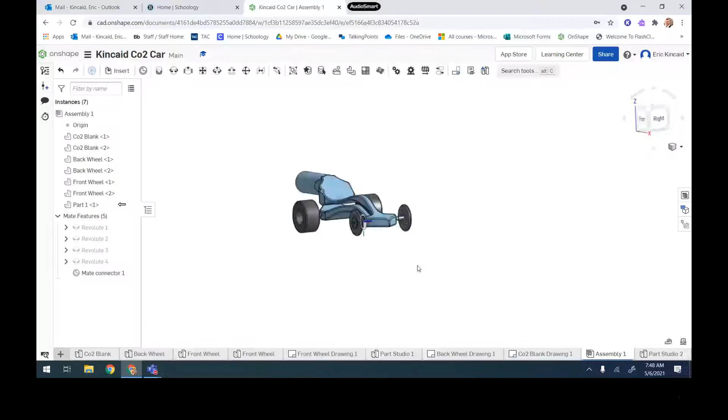All right, today we're going to learn how to assemble our car. So to do that, I'm just going to delete this assembly, and then we'll work through.

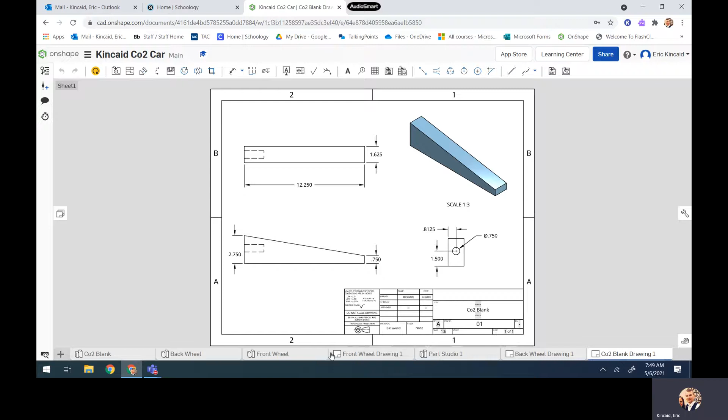I also have two front wheels here, so let me get rid of one. Make sure I got rid of the right one. All right, whoops, there's a leftover axle. Once you have all of your parts, you have your car itself, you have the back wheel, and you have the front wheel, you are ready to assemble.

You can create your axle within the actual assembly, and then we'll pop back to a part studio, right? So you don't have to guess how far your axles will be.

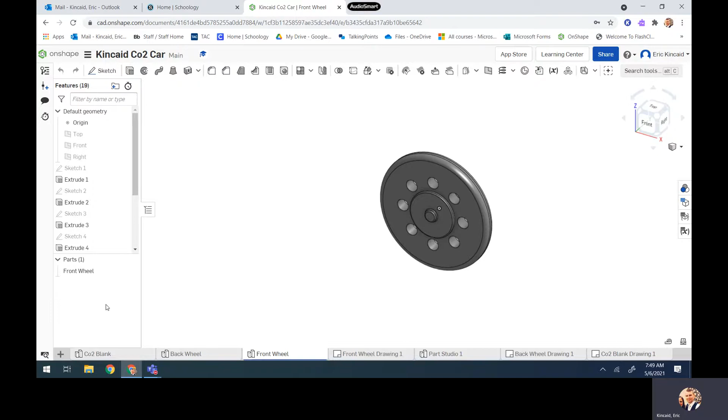So what I'm going to do is hit the plus there and go to create assembly. From there, I'm going to insert all of my parts. So I'll place my blank in there - well, I guess it's not a blank anymore. I'm going to place my two back wheels, and I'll place my two front wheels and hit the check.

Once the placement of your assemblies is in there, you'll see that they are all facing the front. So I'm going to rotate these wheels over here 180 degrees. They don't have to be perfect. I like it so that they are at least 180, and you'll be able to quickly get to them.

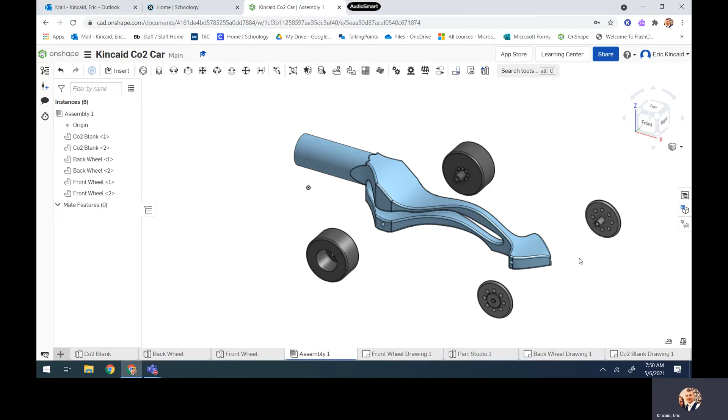But essentially what we're going to do is use revolute mates, connect all of our wheels, and then we're going to offset them 1/8 of an inch from the car, because you do need a little bit of wiggle room between the wheels themselves and the body, or else you're going to have a lot of friction where those two pieces are meeting and rubbing against.

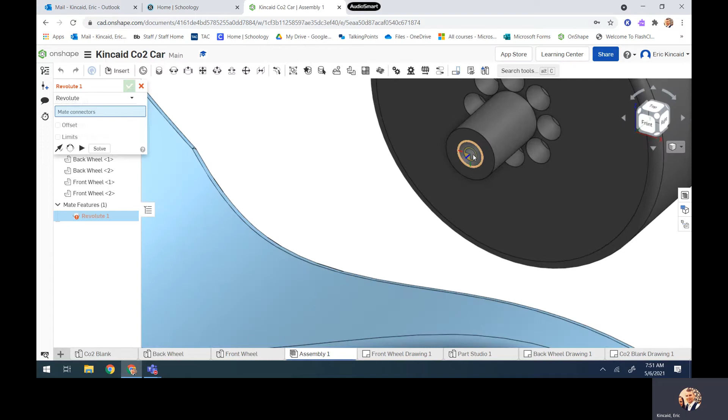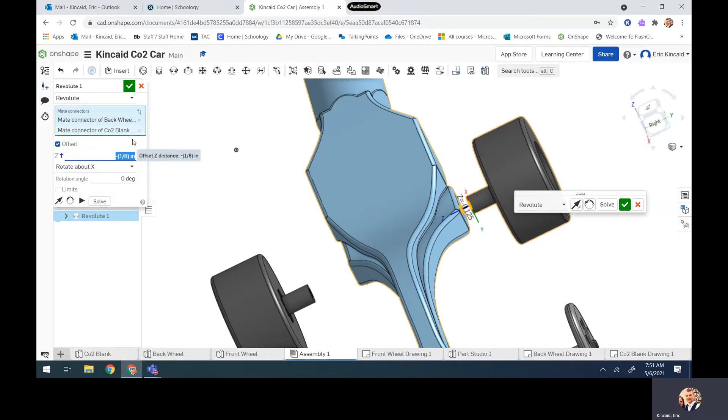So we're going to go ahead and grab the revolute mate, and I'll do the back wheel first. I'm going to grab where the axle will go into the wheel, rotate my car around, and select my axle hole. Make sure that that blue Z line is facing out. And then I'm going to click this offset, and I'm going to offset it 1/8 of an inch. If it goes into your car like that, all you're going to do is hit -1/8, and it'll pop it out 0.125. All right, so I'm just going to go ahead and do that for all of my wheels.

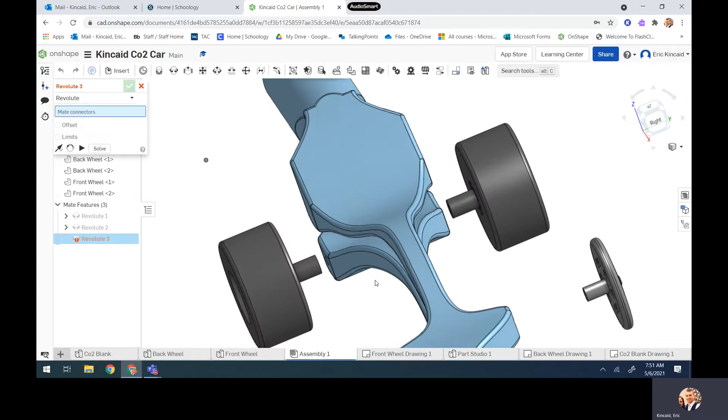So grab where the axle goes, make sure that blue line's facing out. Same thing. And I want to say for mine, it's always going to be -1/8. So it's going to offset it and push it away. You can see that gap there. It's not quite touching the car. All right, let me continue to do this.

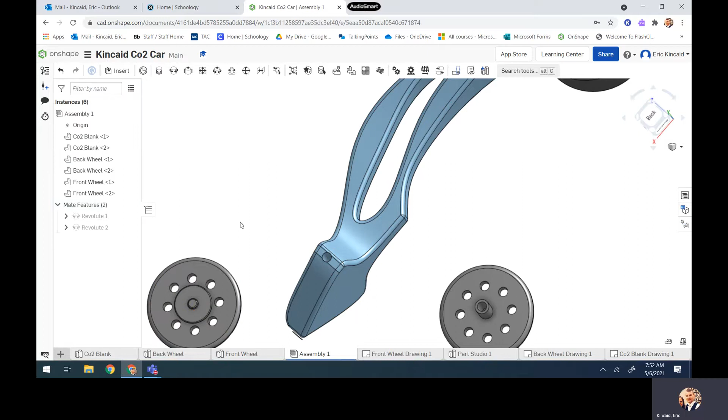And the reason we use revolute mates is these would spin, obviously, and we could spin them. You're not going to see much of an animation, but you could spin. This one's kind of hard for me to get. But you could animate and spin these wheels with the revolute mate. So we just stay true to what is going to move in real life. If you did a fasten mate and it works, it is what it is. That's fine.

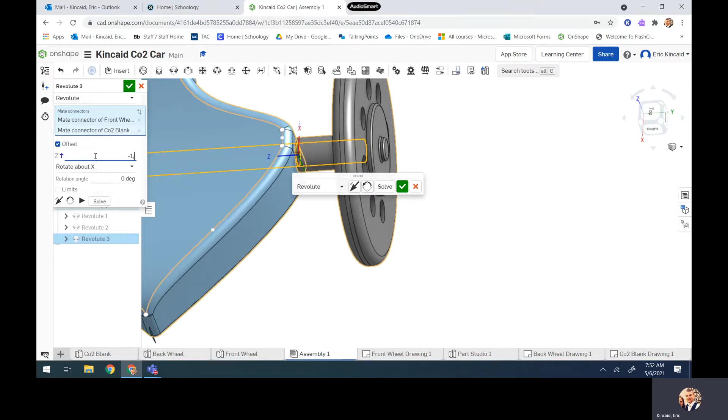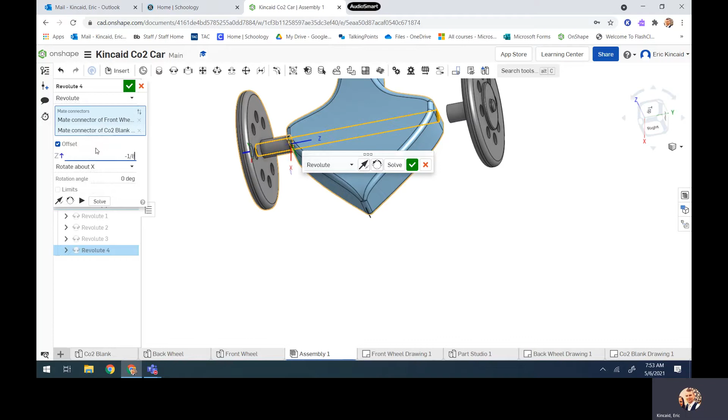-1/8. Hit the check. And then we have one more. Offset -1/8. All right, so we have all of our wheels mated to the car body.

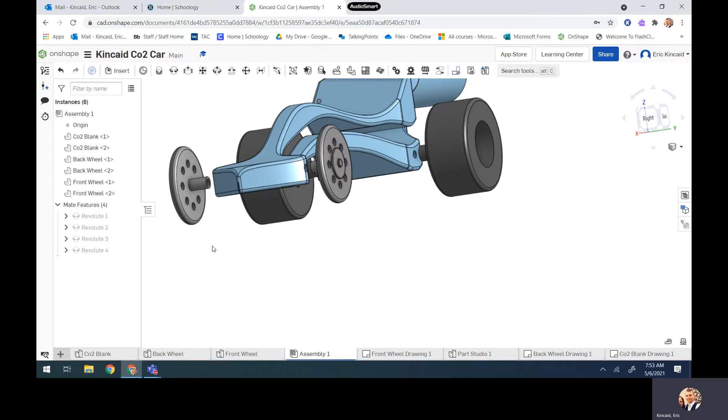Now we need to add our axles. So what that means is we have to place points at the beginning of our axle - I guess you can say where it will begin, which is all the way down inside this wheel, and then it should go all the way down to the inside of this wheel. You want to make sure that whenever you're doing this in person that it isn't the full length, because it's going to end up being a little bit long. So this gives you at least a quick measurement, and it could be longer, it could be shorter in real life once you make it, but it's most likely going to be shorter, but it all depends on how accurate you cut your car body.

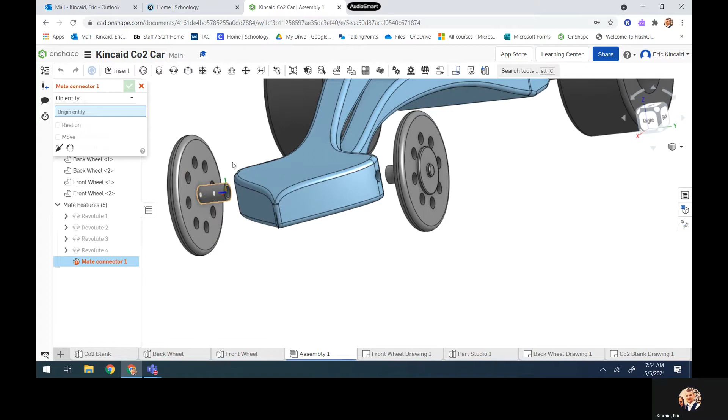So we're going to place 2 mate connectors. We're going to place one right up here. And we're going to place one back here. This one's a little bit harder to reach, but you want to make sure that that blue line is facing into the car. Oh, it only... okay, so it only places one, and then you have to hit the check. And then place another, it looks like.

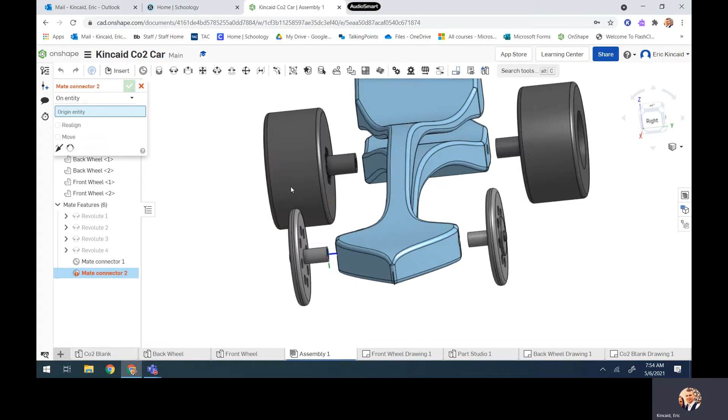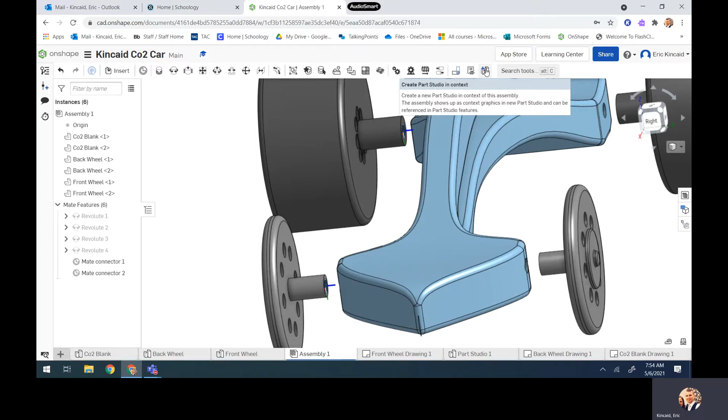All right, so what that's used for is now we can go ahead and create a sketch on here in order to create the axle. So I'm going to come up here where it says Create Part Studio in Context, right? That means within the assembly. And whenever I click that, I want to click on my mate connector here and hit the check.

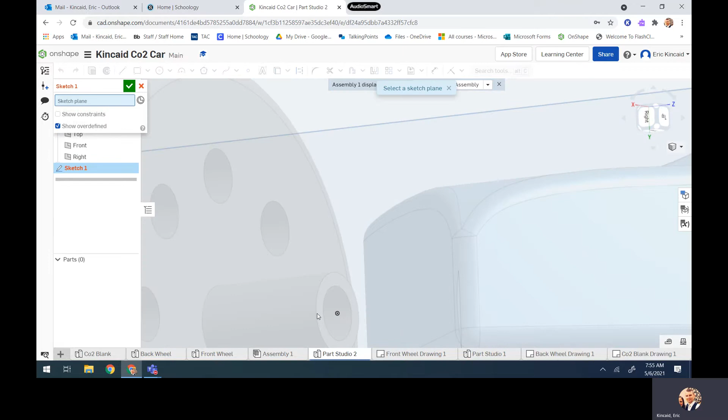It's going to take me into a part studio with my assembly kind of in the background. From there, I'm going to create a sketch, and I'm going to grab the plane right here. I'm just going to draw from the center point here, that mate connector we created, and draw a circle that is 1/8 of an inch.

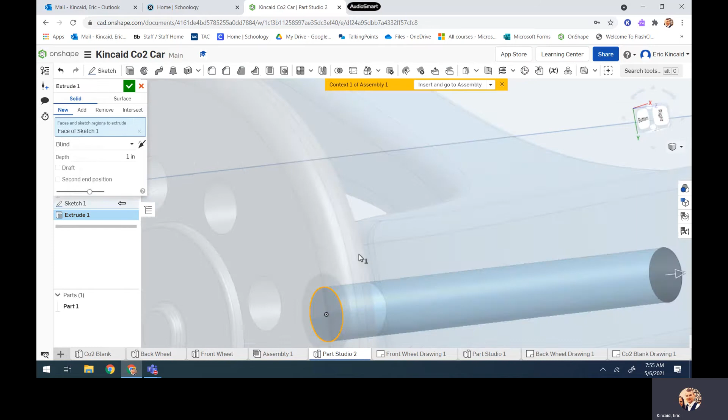I'll hit the check and extrude it. And whenever I extrude it, you'll see, okay, that's how we are making the axle. It goes right through as long as you have the axle hole lined up. It goes right through to where we need it to go.

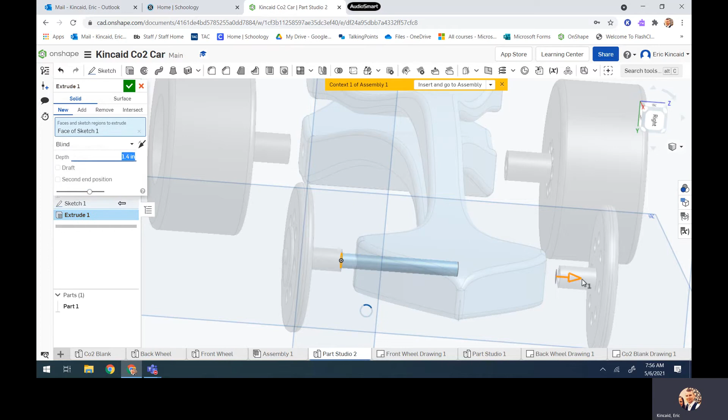Now, unfortunately, it's not going to be symmetric. We could do up to part, but for the most part, you could just kind of drag it. This doesn't have to be the most crazy accurate thing, but you're just going to draw it up to this, and if you were to cut your axle this length, it would be a good length because it would go about almost all the way through and then almost all the way to the back on this side.

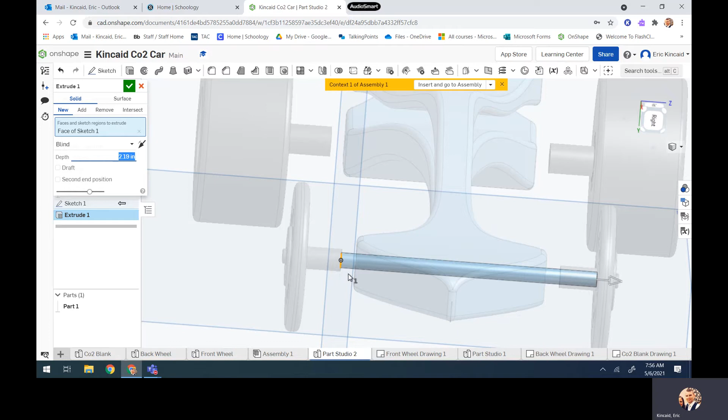So it's going to start here, so it's going to look correct, but in real life, you want this axle to go all the way back here, and it would. So at 2.19, it could be a little bit shorter or a little bit longer. You just want to make sure it's not coming through your wheel over here.

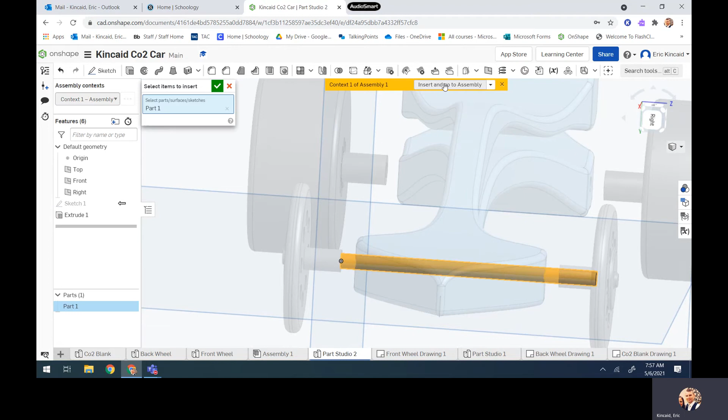And we can go ahead and hit the check and insert and go to assembly. We'll hit the check, and it'll place that on there. So now we have our axle that runs through, connecting wheel to wheel.

Now, you have this mate connector that's shown. You can get rid of it by hitting the eyeball, then it's not in the way. So now I'll go ahead and do that in the back. It's a little bit harder to see in the back because the body is bigger.

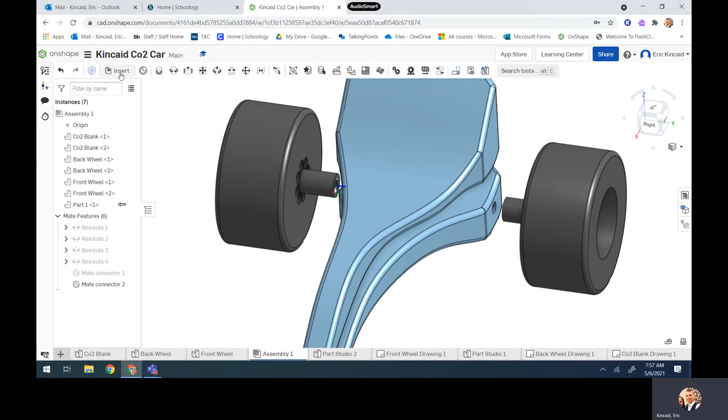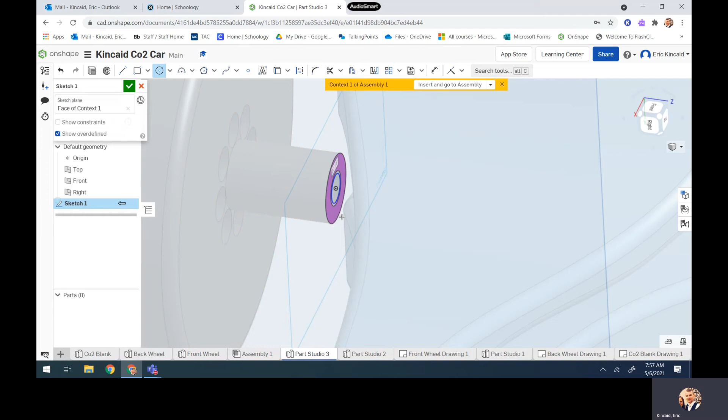But again, I'm going to hit Create Part Studio in Context. I'm going to click on that wheel's mate connector and hit the check. So you do want to make sure you hit that mate connector. Create a new sketch on the back of that, grab the center point, draw it 1/8 of an inch, hit the check and extrude.

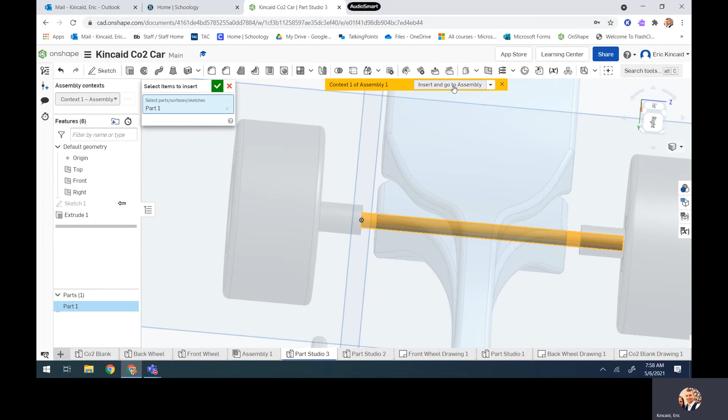All right, so I'm just dragging that out. So you can see I went into that part a little bit. Let's bring it back. All right, I'll hit the check, insert, go to assembly, hit the check again, and turn off the eyeball on the mate connector.

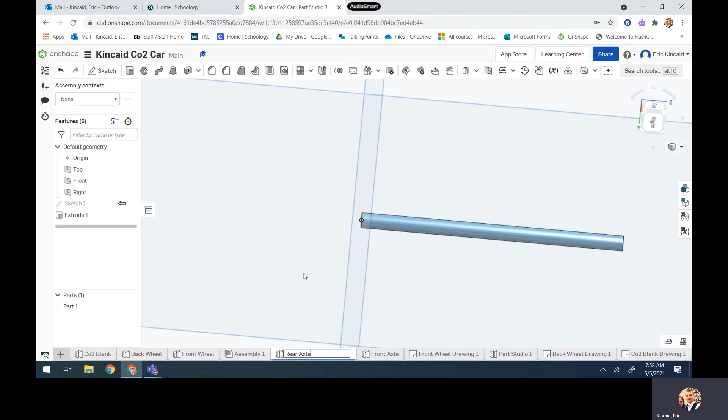And it does add part studios, so like this one's 3, this one's 2. I believe this one's the front, so we can rename it front axle. This one's the back, rear axle. And now you know how long your axles need to be whenever you create this in real life.

If you want to change color of the axles, you don't want them to be blue, you could totally do that right now too. So I'll go dark gray, since if you choose black, it really washes out any detail. It's just a cylinder, but same thing—it tends to look better if it's not all washed out.

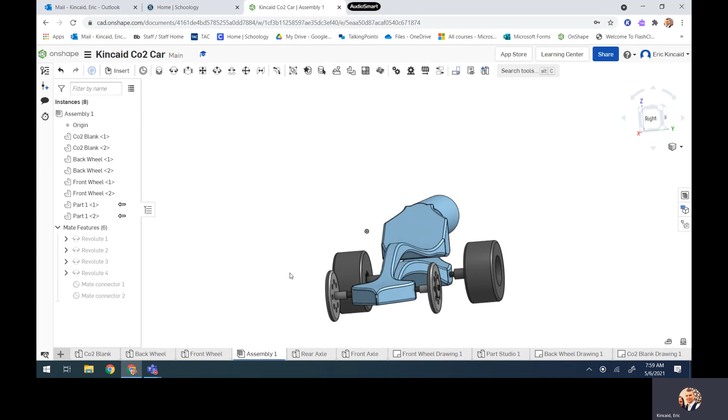All right, so not bad. Not a bad assembly. Go ahead and give it a shot. If you need any help, let me know.